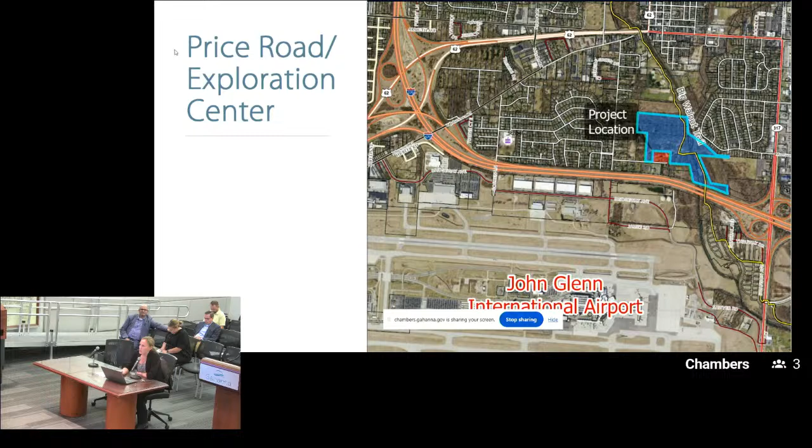The property had an outbuilding, which is actually still used today for storage, and it also had, or still has, a residential property located within that acquisition. An evaluation was done in part because the 2006 Parks Master Plan had a strong identifier that indoor recreation space was a deficiency within the system, and that was reaffirmed in the 2023 Parks Master Plan that was adopted. So an evaluation of that site was done to determine the feasibility of renovating that residential property into recreational space.

Obviously, as you guys know, we had Ms. Bowers and Mr. Weaver over, I think, 2 weeks ago at this point, right? So as I always offer, if anybody would like to come and take a tour, by all means, just drop me an email and we can figure out a time to come over.

But things on the construction site are happening fast and furious. I think anybody who's driven by—how many of you guys have driven by recently? You guys can see a much different 825 Tech Center Drive this month, last month, than you have in months past. Obviously, all of the construction fence is taken down, and they've flipped the back parking lot to the front parking lot.

So we have course asphalt, course paving off the front of the building, which is now where all the construction workers are parking, so they can start work on the back parking lot there. You guys can get a really, really good sense on how that front parking lot functions and how circulation happens, so on and so forth.

Not completely done in the front. We still have some areas off of the police department side that have yet to be paved, but they're working towards some of those things.

We have had a couple of issues as far as it hasn't rained in about 10 days, we'll say, maybe not even, but the heavy rains did impact their ability to get the parking lot paved.

But a lot of what's been going on from an exterior standpoint—the front curbs and the police egress are obviously complete. You can see exactly what that would feel like, minus the exception of the security fence that would be built around the cruiser lot.

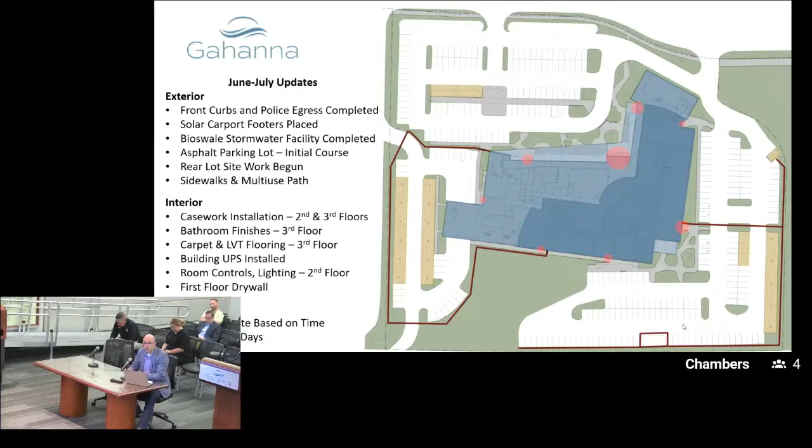By completion, we're 73% complete, and we've had 34 weather days. I want to say maybe 5 to 7 days over the last in June and July, and again that is largely due to the rain. I forgot that my two slides here are the same, so I will keep moving.

Just some pictures. One of the things I did in my last update was show the 1-year photo, so the July 2024 photo in the upper left, and then the July 23rd, 2025 photo. You can see all of that asphalt in the course paving. We can see the multi-use trail being constructed, followed closely by the bioswale, and you can really see how the parking lot itself is going to ultimately circulate, both for police to ingress and egress out of the AEP lot.

And then also how the general public will access the front lot, and how staff and senior center members would ultimately access the back parking lot as well. Just a year ago, July 25th, so just a couple weeks ago, we were still in very active construction as it related to the basement, and you can see the tremendous strides the project has made coming up out of the ground.

So the July financials, we have invoiced 61% of the project. I did actually just receive... this slide is technically incorrect. This is the June financials. So as of June 31st, we've invoiced 61%.

I did actually just receive the July pay application just today in my email, didn't have a chance to get it incorporated into the document here. Generally speaking, those run about $3 to $4 million per pay app, so we're probably closer to 65% for the month of July. And from an allowance standpoint, remember that bottom slide, the percentages are correct.

This is not... we spent $1 million in allowance. We've spent 52% of the allowance budget and 53% of the contingency budget. So we have approved to date $2.5 million in either allowance and/or contingency, so about 53%. Again, we're at that 61% invoice. We're over the halfway point.

So from an allowance and contingency standpoint, we're doing well. With that, that's the end of my remarks for the update. So I can pause and take questions here on the update itself.

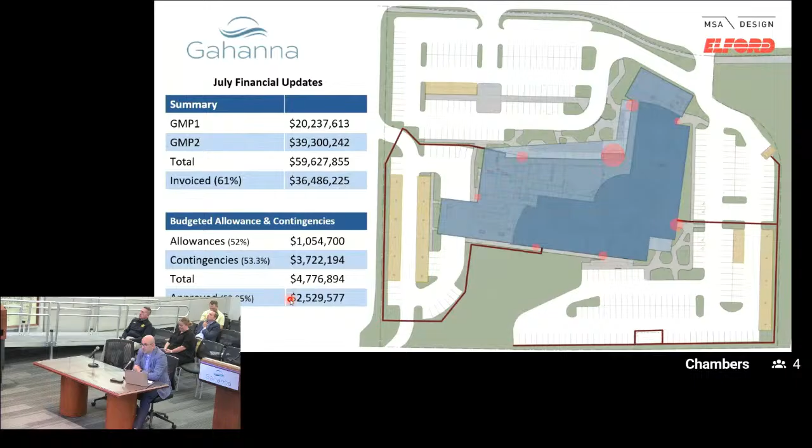Sounds good, Director, thank you very much. Any questions or discussion on the update?

All right, seeing none, I'll just say thank you for the tour. I appreciate it. I appreciate the updates here in chambers, but it is quite another thing to see it in person and just to see how quickly the project is moving forward. So hats off to you and all city staff who are working on this and the team.

Yep, so thank you. It's a big effort on the entire staff's part, many folks who aren't even in this particular room. So great to point out those folks that do work on the project.

Next item, please, sir. Next item is actually an oversight on my part. So when we brought the full furniture, fixtures, and equipment contract to you folks back in May, I should have also been presenting the 911 console furniture at the same time as well. So this is a bit of a cleanup item.

So just by way of review, we have a total FF&E budget of $2.3 million, reflective in that top line there. If you guys review my comments from May when we did the furniture budget, you'll see very similar parts and pieces here, I just reorganized them for this conversation. But we do have an equipment project 2502 for 911 dispatcher workstations, allocated during our CIP process for $160,000.

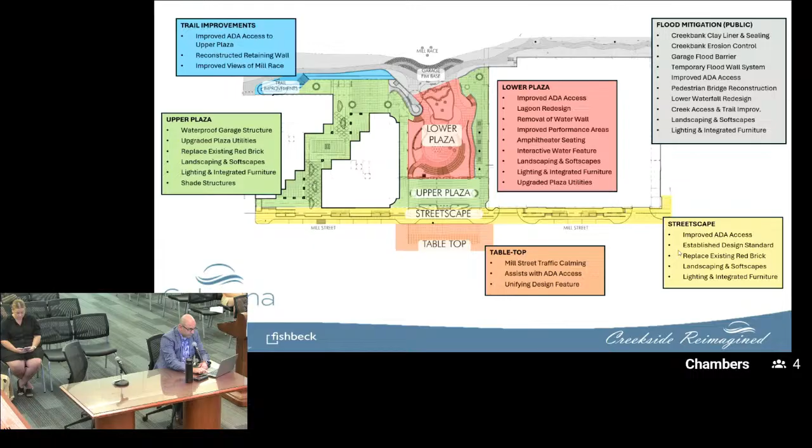So as we move on here, I'd like a lot of the renderings to speak for themselves. We'll start with the overview—you have Mill Street here on the right. Let me grab my marker again.

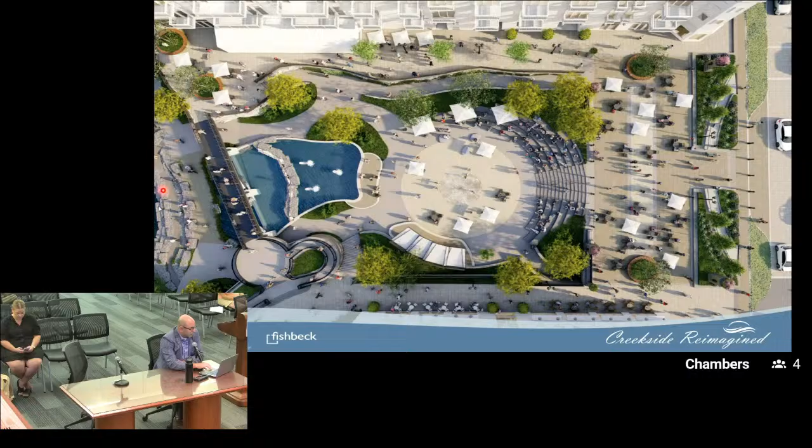We have Mill Street over here on the right, and then we walk all the way over to the creek on the left. We've kept many of the features the same, but the one thing I'll point out immediately is that this middle lower bowl area becomes much more functional with the reduction of the lagoon itself. We host a lot of events where Mill Street needs to be closed.

So how do we create a workable space inside of Creekside itself that limits our need and desire sometimes to actually close Mill Street and host events?

Obviously that's the most striking change that we make to the lagoon itself. But as you can see through the rendering here, there's also an opportunity for some amphitheater style seating, so you have the ability to have a performance. But if somebody just wants to sit there on a Tuesday afternoon for lunch on a beautiful day, they have the ability to do that as well.

The pedestrian bridge over the lagoon stays intact. It does get refurbished, but it stays intact 100%. And as we get into this, you'll see some creek improvements as they happen on the opposite side of the bridge here.

So moving on, this project is primarily a flood mitigation project. What does that mean? You guys all know that the garage basically sits under each one of the buildings, almost the entire length of the facility. You've been down there when there's water infiltration largely through the ceiling. But the structure itself is also prone to flooding when we have those major events and Hoover is released and so on. So in order to achieve the FEMA requirements and the flood certificate, there's a clay liner and sealing that needs to be done on the entire bank, which the mayor has described, primarily the entire length of buildings A, B, and C, and then the central plaza itself.

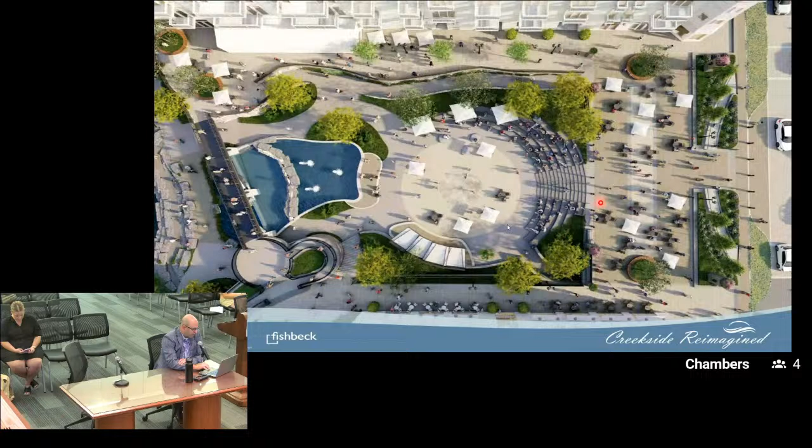I'm going to flip back to this particular picture real quick. This whole entire area here is in the upper plaza. I realize we're talking about flood mitigation, but one of the things is that this particular ramp is currently not meeting ADA standards and needs to be updated. So this is actually part of the core project, part of the flood mitigation project. There's also work they need to do directly below that structure in order to flood-proof the garage, so they would take the opportunity to improve this particular area right in here.

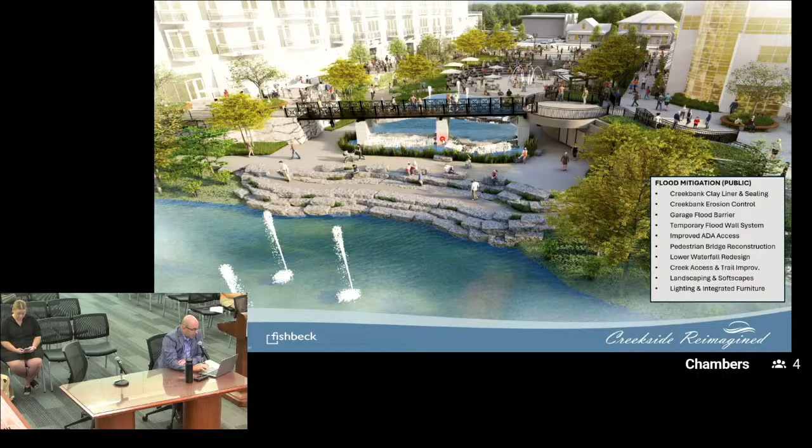The pedestrian bridge gets reconstructed. One of the things we've learned during this project, I think just last week, is that this middle column here is not a structural column, so we've actually recommended that it come out. This way you improve the views from the lower plaza over to the creek and the natural area that's just on the other side of these water jets here.

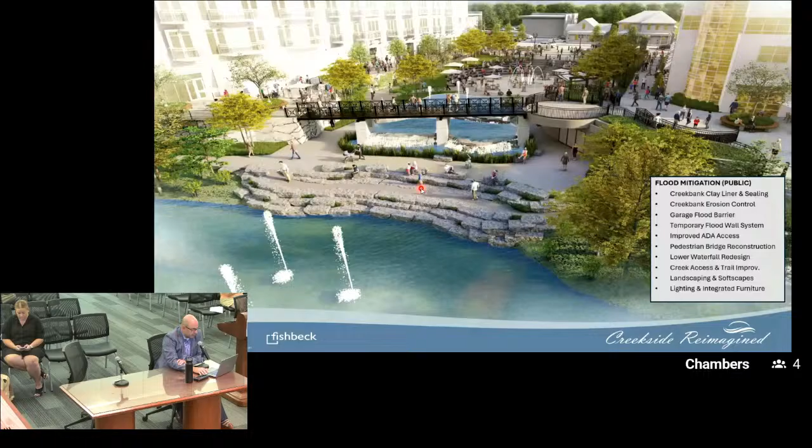The lower waterfall gets redesigned. The lower waterfall, the trail, and the access to the creek itself ultimately gets redesigned. And then there's different lighting improvements and landscaping improvements that happen along the entire trail here. I have many more renderings we'll get to in a couple minutes. But there's those softer areas, and even street furniture gets improved, so we create some spaces that don't currently exist today.

Just moving on a little bit here, right? So trail improvements, the blue area on the main site plan or overview map. The trail improvements - this space in this particular area is rather disconnected. So we're at the backside of Building C, the alleyway, if you would, to Mill Street. Hopefully that clears up - the alleyway to Mill Street is right on the right-hand side of the screen where the red arrow is now. But the trail improvements improve the ADA access to the upper plaza.

Right now, in order for somebody in a wheelchair or having mobility issues who needed a handicap ramp, they would have to go to the far front of the property to access the upper plaza to return to the live music on the backside of the property. They could go into the buildings and take the elevator upstairs, but this redesign would open up the upper plaza to the lower trail system immediately.

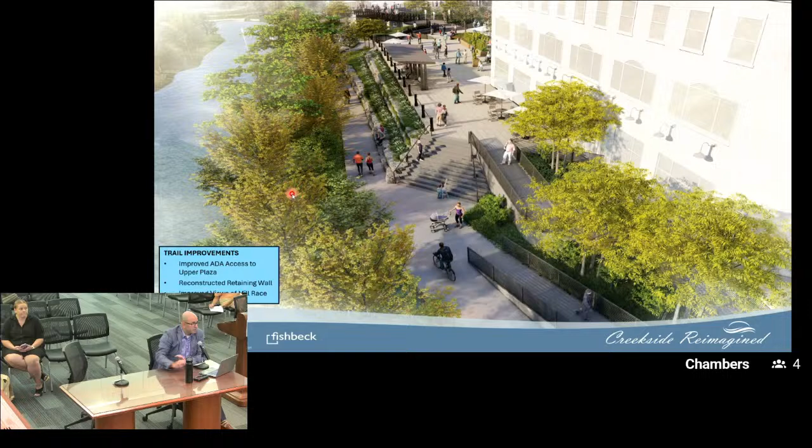I'll note they haven't done a tree survey yet, but the trees would have to be thinned to accommodate the clay cap and that construction. So there would be some thinning of trees. I don't believe it would be as heavily vegetated with mature trees as it is now, but they can install the clay cap and erosion control measures around some of the more mature trees. Our plan would be to maintain as many of those as possible.

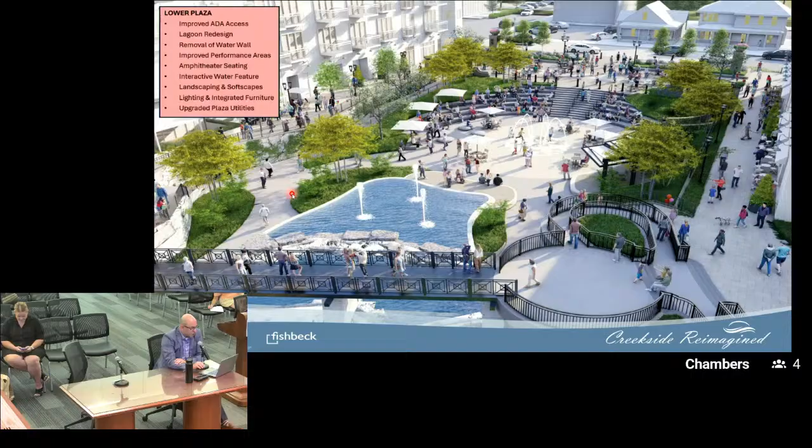Moving on to the lower plaza, which is the red area on the site plan. I have two slides representing it. As you can see from the overhead shot I already talked about, the lagoon gets significantly reduced in size, which opens up the lower area to a greater than 5,000 square foot programmable area off the front of the plaza. I've talked about the amphitheater-style seating on both sides of the formal staircase that takes you from Mill Street down into the lower bowl.

This area, as preliminarily designed, hosts two different stages. There's a stage at the front of the lagoon where performances can take place, and a more formal stage on the right-hand side, a little more central to the amphitheater. There are other renderings that show this space activated in a variety of ways.

One example is a winter scene with the big Christmas tree that currently goes on the upper plaza, shown in this vicinity. There's another view showing a high school orchestra sitting in circular seating in the middle with visitors watching. This whole area can be activated in a variety of different ways just by shrinking the overall size of the lagoon.

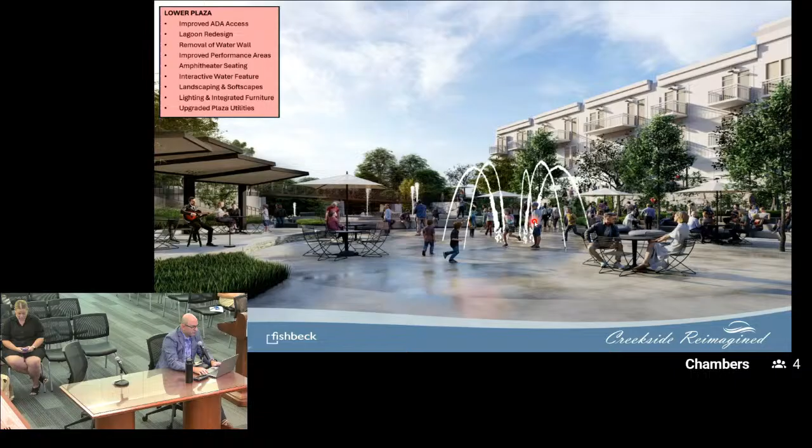At the same time, this is one of the more mechanical things, but all of the plaza utilities end up getting upgraded, whether it's irrigation for the vegetation and flower beds, electrical services, or natural gas services that feed one of the fireplaces over near the Barrel & Boar side. How do we upgrade those services to unify them throughout the plaza itself?

The upper plaza is everything I'll refer to as street level or better. There's a couple of steps you need to take to get to the upper plaza itself. But one of the issues with the garages is that there's a lot of infiltration from that upper plaza area as it rains and as that area gets saturated. There's a lot of water that ends up in the garage because water goes down, generally speaking. Drainage is...

Past its useful life, we'll say it that way. In order to dry flood-proof the garage, the ceiling of the garage, if you would, every red paver, every red brick out there needs to be removed. The surface needs to be reconstructed, waterproofed, and then those pavers would need to be put back in place.

So when we talk about the opportunities that this particular project creates — if we're really going to dry flood proof, it's not a requirement from FEMA, but in order to extend the life of the garage and the structure, it's advantageous for us to do that. Why would we end up putting back all of the red bricks that are there now? Why wouldn't we upgrade those at the same time we're dry flood proofing the upper plaza?

If we need to remove something and rebuild it, one option is we could just put back all the red bricks. But one of the things we discussed at length is that this should be a total improvement and not just a singular aspect of the project itself.

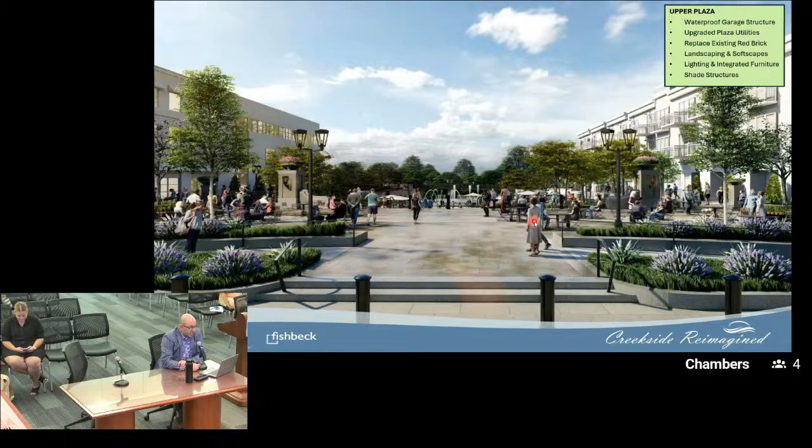Again, the landscaping and softscapes, I think you see that throughout the overall renderings. I'm going to go back to this — you've seen this particular rendering as well, but this is also the upper plaza here. There's a nice cantilever swing-type set that overlooks the area. You still have a variety of opportunities for outdoor seating and patio spaces for the restaurants, and all of that exists in this particular area.

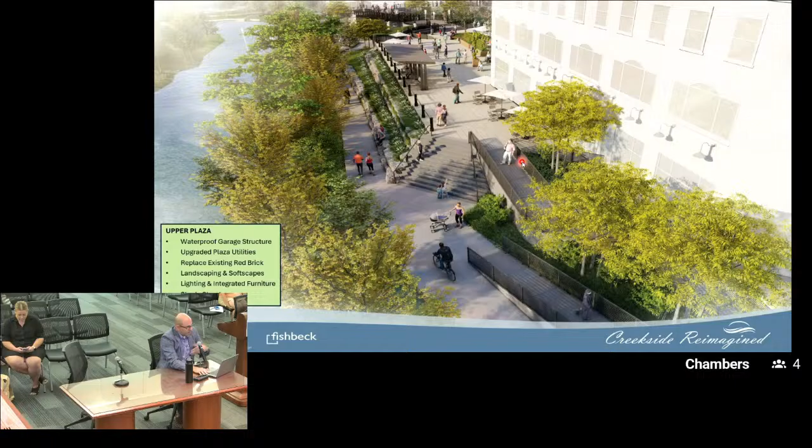We don't necessarily have a great rendering of what happens in between buildings B and C, but we've talked about activating that area where it's more like a street market, with some shade structures over the top. Maybe a fire feature in the middle of that particular area, but then there's also planting beds through that area that double as seating. I believe Pod is working on a couple of different renderings for that area as well, so as we get feedback, we can refine those designs and areas.

Just as important to the overall plaza design is the street itself. The street is the front door. In my opinion, and I think this is shared by many, this is the front door to the city of Gahanna. This is the key quintessential part - when people say Gahanna, they say oh, I know that downtown, I went to something at the visitor center, I went to something at that plaza, I went to a cool event, they got a really neat plaza area and creek bank. But the front door is the streetscape itself.

Obviously, we have a lot of red brick, so a lot of things need to be coordinated, and synergies between the plaza design and the street need to be discussed. One thing you see immediately is all the vegetation out front - I like how we put in lavender plants throughout these beds. It also creates two opportunities to get up to the upper plaza by two accessible ramps, and a smaller profile for the steps that ultimately get you up to the upper plaza.

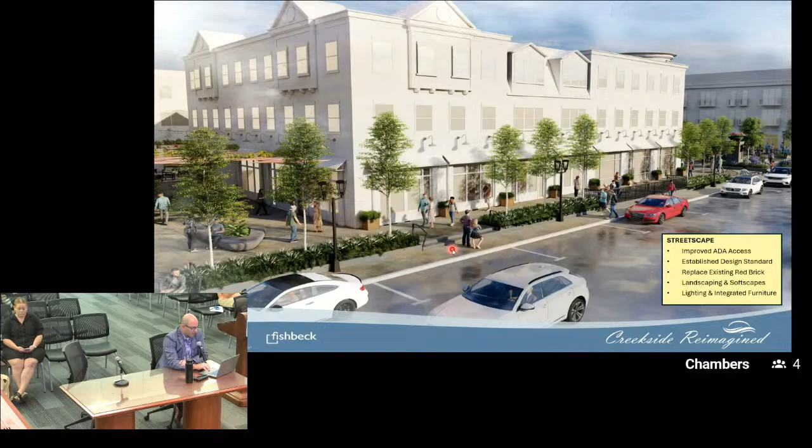It's just as secure, so we have bollards throughout the front of the streetscape. We've maintained this valet area, and we've also created other opportunities to access the sidewalk to the upper plaza area. You'll also notice other areas where you can create bistro-type seating and additional seating on the street itself - this is right around where Cold Stone is. You can see the shade structures designed up top, and some planting features that also function as seating.

This is one of the areas we're focusing on heavily because it doesn't just impact the west side of the street, but also the east side. How does that get redeveloped at the same time? I'll note that the numbers on screen take into consideration streetscape improvements on the west side, but not necessarily the east side. But one thing it would do is develop a design standard that says how things on the east side should be put back in and ultimately replaced.

So we do see numbers on the screen. Let's talk about those for a second. One thing we've been working on heavily - staff and everyone on capital projects - is refining the way we do estimates. I've sat in a lot of meetings with the Fishbeck folks, and they're probably getting tired of me. They say this is a quote-unquote all-in number, and I ask what does that include, a total number? I've asked that question six or seven times, and I'm confident that our contingencies are appropriately where they need to be at this point. We have an 8% escalation because we don't know exactly when we'll get into construction, and the construction industry is a bit variable right now. Generally, CM services are charged at about 12%; right now we're estimating about 18% inside this project. So I think our estimates on each phase are very good.

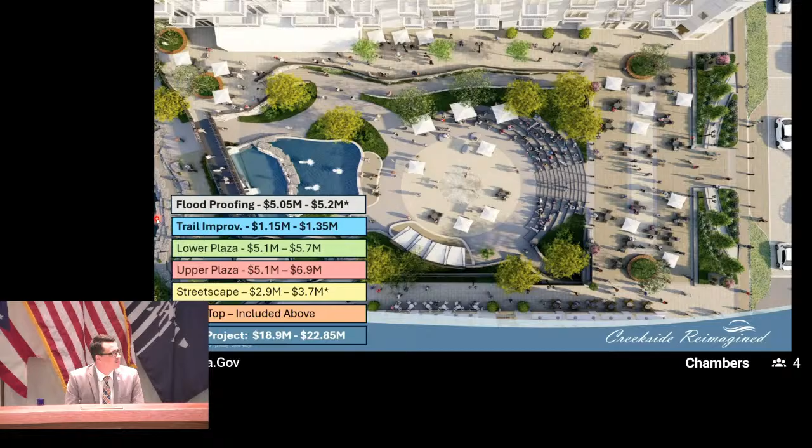Mrs. McGregor: On the front of the building along Mill Street, the steps act like flood protection. Is the 2 steps sufficient to provide that, as opposed to the 3 that are there now? Yes, the elevation itself doesn't change. So the top step is still at the same height as it is today.

I saw Ms. Bowers and then Ms. Padova. Okay, great. Thank you, Director Schultz and Mayor Jadwin and everyone involved in bringing this forward. I think it's a lot to ask people to start to re-envision what Gahanna should feel like and what Creekside should feel like, but it's been nearly 20 years since this plaza opened, so this really gives us an opportunity to gain some of the things that were missed 20 years ago, and maybe re-envision what the community actually wants with the input we've been getting.

With that said, a couple of questions. Do you think it would be possible for us to get an economic impact analysis on this? Because I think there's going to be significant economic impact as a result of this. I know we're in a beginning phase, so I wouldn't imagine we have that yet. Montrose is actually working on that as we speak.

Okay, excellent. And then, process and timeline in terms of how long would this project take the plaza offline for residents? How do we make sure we're coordinating that with planned weddings and other important events down there? And then also, I think part of the economic impact analysis would be what we're potentially looking at in terms of impact to business during the construction phase.

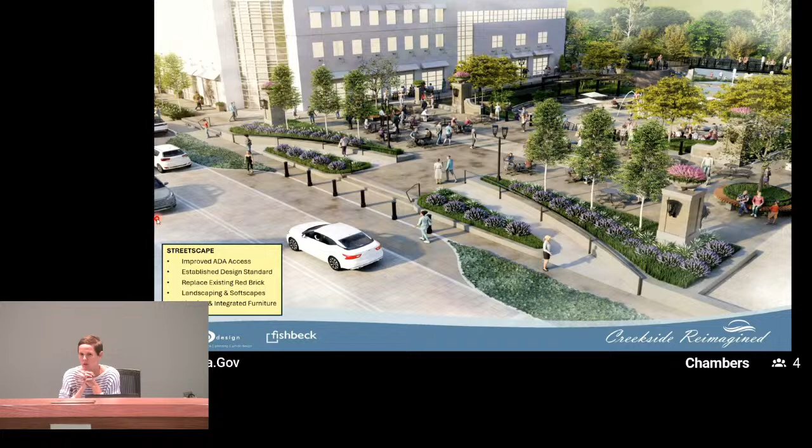And I just want some clarity, because I know we are not responsible for the buildings, but the patios such as Cantina and Barrel and Boar - are those patios part of the plaza? Are they part of the buildings? I'm not sure exactly where those lines are and how this would affect those.

Yeah, so by agreement, the building has, maybe by easement, an area in front where their patios are to be. So they're actually our responsibility, and they lease those through agreement within the Creekside agreement that the property owner has with the city. So those would be ours to reconstruct.

I will note, and it's important to note, there's a variety of different considerations. When you guys look at those numbers, there is a portion that should be borne by the property owner, because there are utilities in the garage, as an example, that need to be moved out of the flood zone, and those utilities service the building, so have nothing to do with the plaza itself. My cost estimates for the project do have that taken into consideration.

There are other areas on the streetscape that the property owner is responsible for, the sidewalk. By agreement, we're responsible for some sidewalk out there, and the property owner is responsible for other sidewalk. So we're also trying to get a cost estimate as to what's the fair and equitable position for those types of improvements. But the patio spaces inside the plaza itself are leased, and I think through this process we even have the ability to enhance that particular agreement and exactly where folks should be and where they shouldn't.

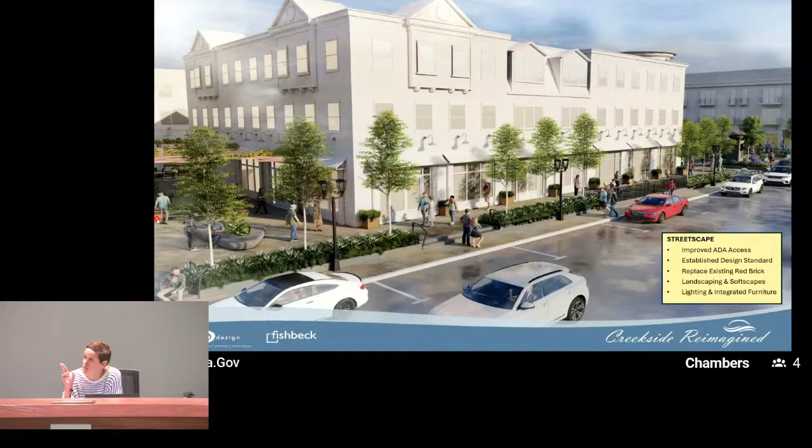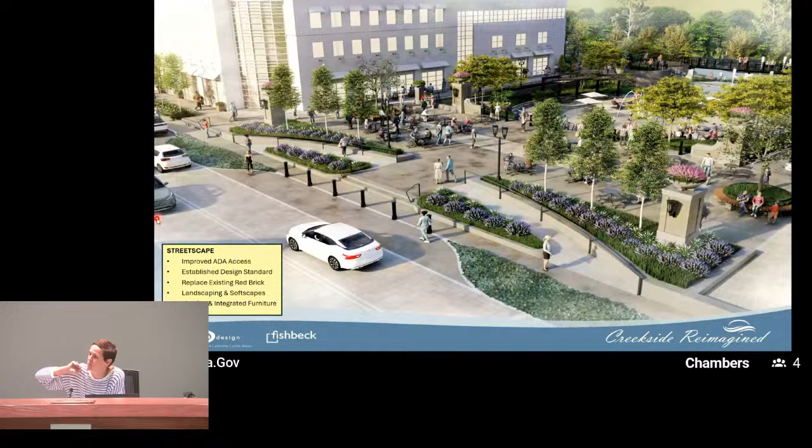Okay, thank you. This picture made me question this, but the other picture you showed, I think, cleared it up - but I just want to ask to be certain. Sorry, go back to the other one you just had. So the front door, yeah. I know a lot of the restaurants receive deliveries that pull up there to unload. Will that space still be big enough for the large delivery trucks that pull up frequently?

Yeah. Okay, so basically what you're looking at - you see where the white car is there? This lady probably shouldn't be walking here, she should be on the other side of the bollard - this is showing what not to do. I didn't notice that woman until right now. But this is the valet area. There's no curb actually between this vehicle and the bollards - the bollards create the curb, and the actual curb is along this particular line here. Now there is a variation of the design where the curb is here, and there's no quote-unquote tabletop, which you saw in the first picture. But yeah, this space here would be almost the same exact size as it is currently.

Okay. And then, I might be jumping ahead here, I'm not sure if you had more to say, but I assume this is part of the CIP, which would be part of the budget. How long does it even take to do something like this? I'm sure it depends on the phases of how we do it to help businesses and all of that, but is there some sort of approximate timeline of how long this renovation could take?

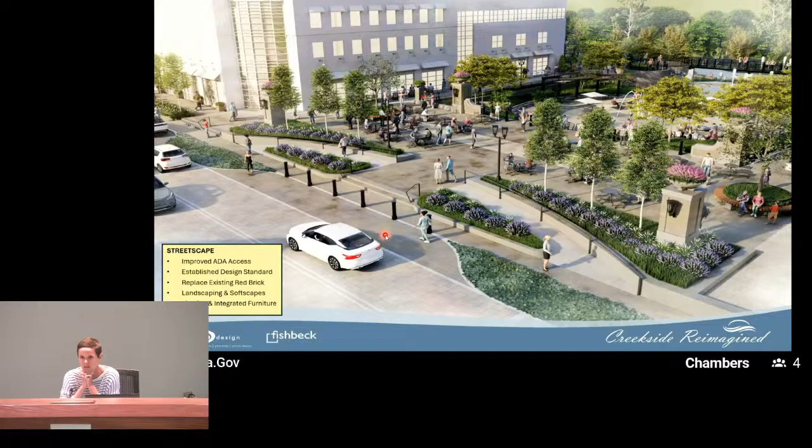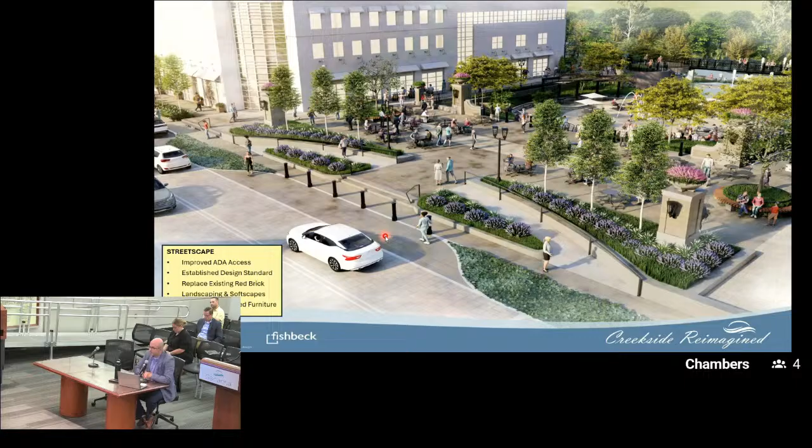I wouldn't doubt it to see that this stretch into a 24-month or 30-month type construction. Now, because of the diversity in areas in which we're going to be operating, I do think there's the ability to mitigate some of those impacts. But until we get a little bit deeper into it, it's a little bit of a moving target at this point.

If I could, Director Schultz is right. We've all asked that question. And to your comment earlier, Councilwoman Bowers, about the impact to the businesses in that area - first of all, this project, whatever we do, is going to be an improvement, whether it's all of this or a portion of this. It's ultimately for the benefit of the businesses, but it will be difficult as we go through that. So understanding what those impacts are, how we minimize them, how we support businesses throughout the construction process has been an ongoing conversation and questions we've raised.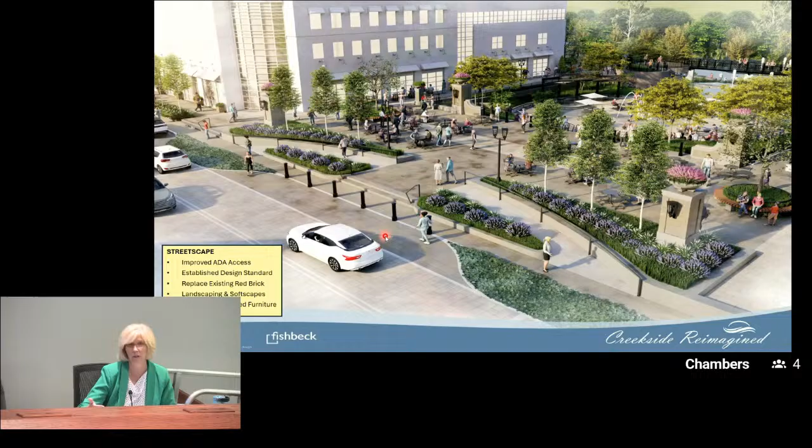I think, first of all, we need to understand exactly what it is we're doing. Director Schultz shared the gray and the blue. We know we need to do the gray. We're recommending we do the blue. Whatever else we do beyond that is going to be conversations that happen here.

Once we know that, we can work further with the design team, and probably construction management as well, in terms of understanding what can be done when, and how long it's reasonably expected to take. We've just had high-level conversations about whether it's better to do it all at once and get it done in a shorter period of time, or extend it a little bit here and a little bit there. So those will be conversations that happen once we know exactly what the project is, then we'll be able to get into it a little bit deeper.

I would also expect there to be conversations with the businesses, engagement and hearing from them too as we go through this. So I think it's still TBD, but those issues are all very much in the forefront of our minds as we consider what would happen down here.

Is there a planned presentation to the chamber?

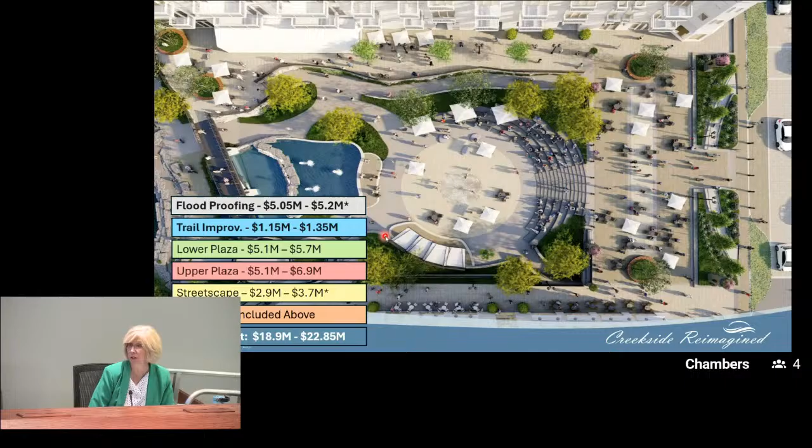So we are currently working on scheduling community engagement. Obviously, we have the ice cream social - you heard Director Vollmer speak earlier about that. So we're letting that piece happen first, and then following up. Right now we're working on venue options for where to have community engagement, and also working on focus groups and conversations which would include the Creekside businesses and some of our stakeholder partners, such as the Chamber, Visit Gahanna, et cetera. And we'll be at a variety of events, like we normally are.

We'll have a presence here at Touch a Truck as an example. I believe we'll be there with posters and such, gaining that valuable feedback as we go, not just through those engagements, but then also, to Mrs. Padova's point, through the budget process.

One other question - you mentioned that to do the flood proofing, all of the brick needs to be removed. I'm just curious if the flood proofing estimate we have up there is just for doing the flood proofing and then not putting anything back? No, sorry. Let me clarify for us.

I probably only figured this out last week myself. The flood proofing itself is the creek bank, and then any improvements needed to keep water from coming through the wall of the garage and into the garage. The dry flood proofing I referred to, and the removal of the bricks, that's in the upper plaza number.

And that's not necessarily a FEMA requirement, but in order to dry up the garage, that needs to be done and should be done. If we're going to remove the bricks, lay down a barrier, and then put the bricks back, we would be putting back new bricks. And that's what's shown in red on this particular slide, but it's technically green.

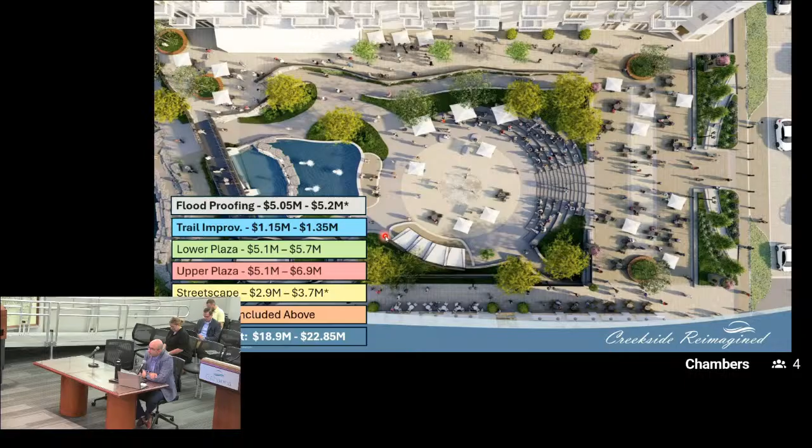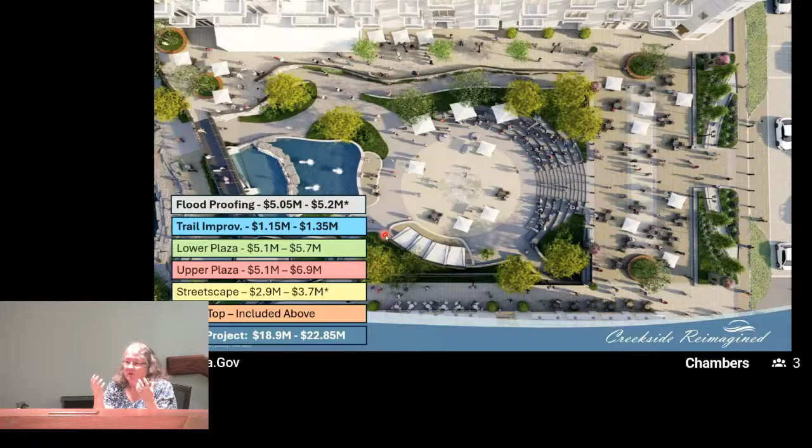The one thing I really like about this is the water wall's gone. When originally planned, it was to provide a visual from Mill Street to the creek area. And when they put that water wall up, it just cuts off the view of the plaza and the trees and everything beyond it. I don't know how that got in there. That was never a good plan to me. So I like seeing that gone.

It reminds me a lot of, if you've ever been to San Antonio, La Villita, a little village, they have an amphitheater with the stage at the bottom, and that amphitheater seating looks very much like it.

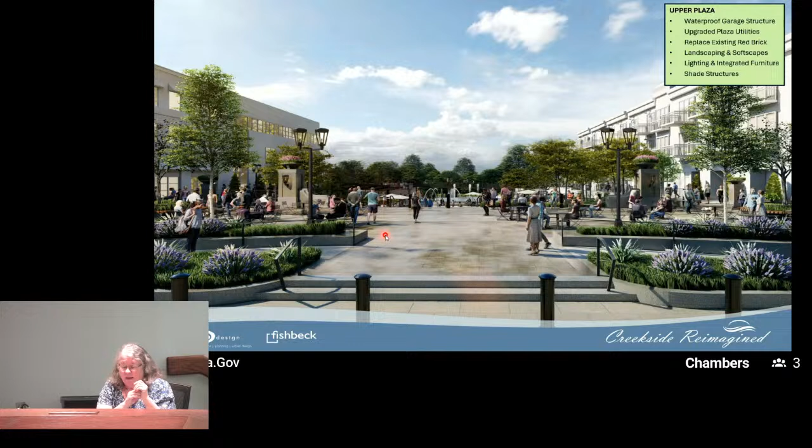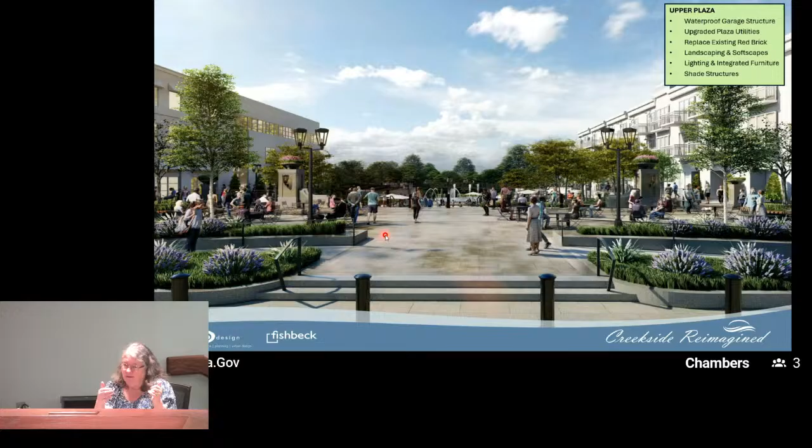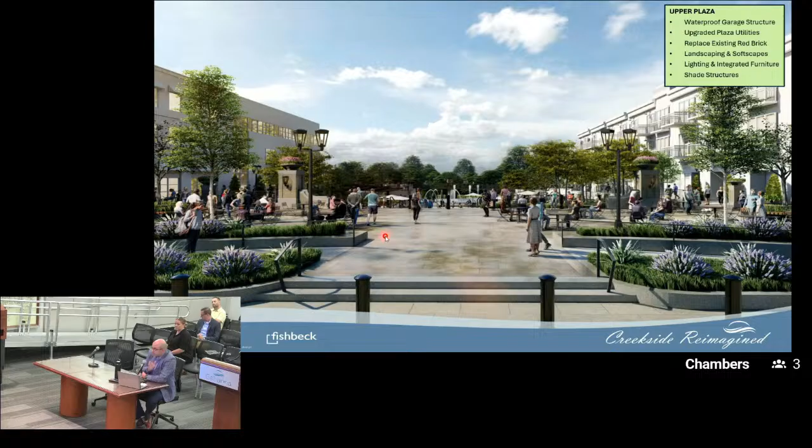One question - this is going to be a many-year project, but in the meantime, some of the structures there have issues with their flood protection along Mill Street. Is that going to be corrected now? Like in front of the old Bag of Nails, that planter in front of them is cracked. No, this project stops at the alley and stops at the end of Building A.

That's where some of the issue and challenge comes in, because that's technically a private property issue and matter - those folks should be taking care of their own planter. In their own best interest, they should be taking care of that. Okay, all right, that's right, I forget that's south of there, okay.

So I did pull up the picture of, from a perspective standpoint, standing at Mill Street and having the ability to look through the entire plaza.

Yes, I think you're absolutely correct. The first time that I came to Creekside, I believe I was working for the county at the time, and I came to Creekside to go to the event space upstairs. This is the first time I'm there, and I'm like, where is this place I'm going? I don't really know where I am. I'm coming up out of the garage and I'm on Mill Street. And then I said, like, you almost don't even know it's there as a new visitor or a visitor period. And what this really does is it really opens your eye all the way up to the bridge and then to the creek beyond. It just opens the vista up to the whole creek.

Absolutely, and it's which is what it was intended to do. And I think it's just a better functionality of the space, because right now, if there's something going on in that lower area or even on the backside of Creekside, as a visitor to the space, you don't even know that it's taking place.

Thank you, Mrs. McGregor. Any other questions or discussion? I guess I would ask then, what can we expect next from you, sir?

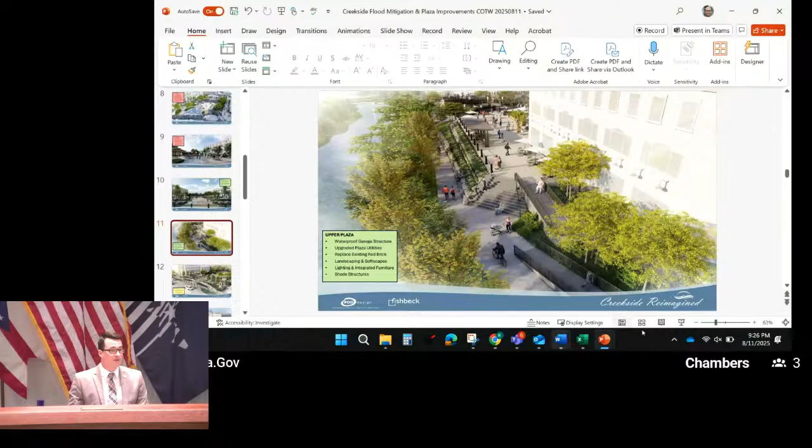President Bowers. Yeah, thank you. We have not had a marathon meeting like this in a while, so I'll keep this very brief.

As we have done in years past, we have a resolution proclamation designating August 2025 as Share the Road and Distracted Driving Awareness Month. As I think everybody here is very familiar, Gahanna is a very proud active transportation community with a vibrant cyclist community. We have here tonight joining us Patricia Kovacs, who is a very welcome and friendly face involved with our bicycle transportation advisory committee and other types of cyclist advocacy and safety throughout the community.

This year, I also wanted to bring to our attention a situation of a young woman, not even 40 yet, a triathlete who was cycling in Northwest Ohio, who was killed earlier this year when a young distracted driver crossed the center lane. She had a vibrant triathlon team, and we expect to be joined by one of her mentees, Nicole Reese, next week, who will speak to Roseanne's zest and love of life and what the family hopes to do to drive awareness to the importance of sharing the road.